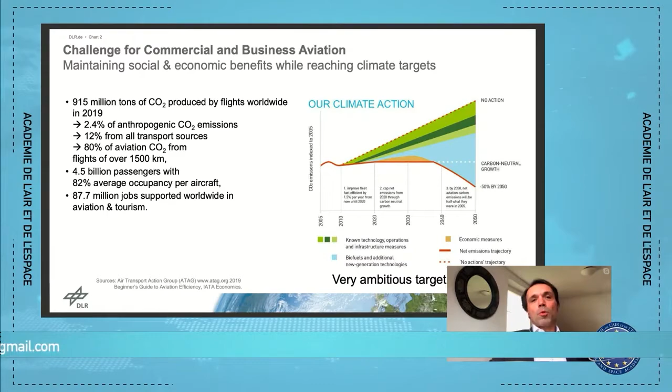Now, the air industry is a huge industry. We're looking at 4.5 billion passengers going from one country to another, one region to another. The movement of people is what creates jobs. We have almost 90 million jobs created by aviation alone. So we can't put an end to that, but it makes sense to organize a transition towards a decarbonized aviation industry.

On the right-hand side, you have a well-known chart. There are many others, but this has been around 10 years, since 2010, 2011. What was being highlighted here is that with technological improvement, we can bring down fuel consumption and therefore CO2 emissions by 1.5 to 1.8% annually. Accumulated, you are looking at spectacular numbers. Nonetheless, that is not enough to reverse the trend or to reach the objectives stated by society or indeed the air industry.

I was fortunate enough to work for a research institute. We take this as a starting point. What we find is that these goals are very ambitious indeed. So how do we propose to go anywhere near these objectives? And one item made clear this morning is the cumulative effect.

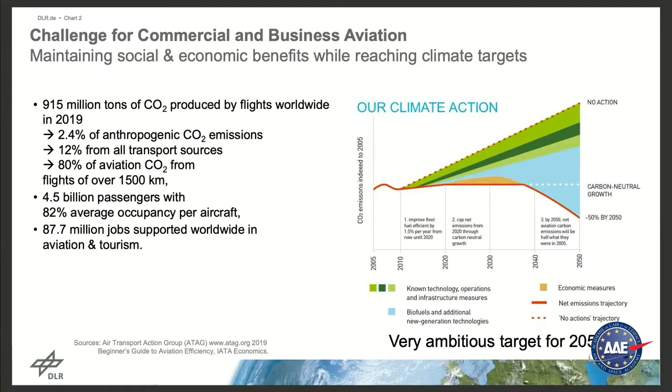Global warming related to the concentration of CO2 in the atmosphere is a cumulative factor with very, very long time scales. So even though, and we saw it today, in 2020, we find that there's a significant decrease in air transportation and indeed transportation in general. Nonetheless, that is not going to bring about a reduction in CO2 concentrations in the air over the same period of time. It will take a much longer period for this to come down.

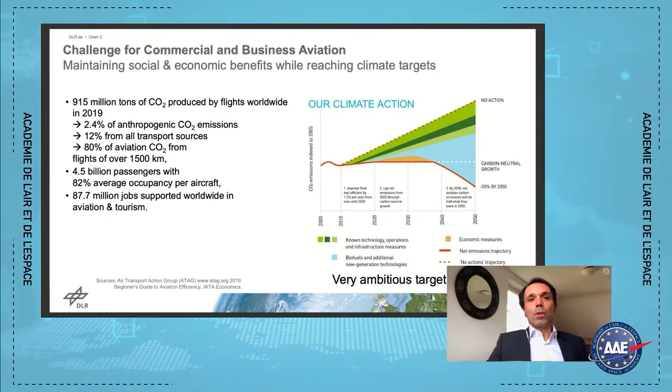So to reach the objectives by 2030 or 2050, we have to start working today. Indeed, we should have started yesterday. We can't expect to start working in 2030 and hope to have results in a few years' time.

Now, on the next slide, this reiterates to some extent what was clearly summarized in this morning's presentation, and of course Xavier went into details of this, but I would like to revisit this chart because you have the emissions from an aircraft, and we can see what changes this causes in the atmosphere, either by chemical reactions, a change of phase, or indeed the presence of aerosols. And then you can see the effects on climate.

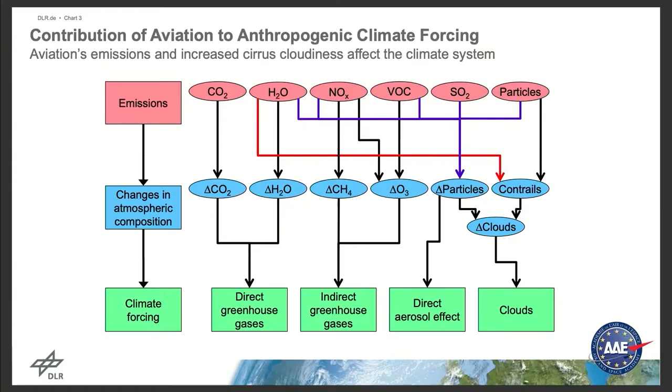So you have CO2, you have water vapor. So whether you burn hydrogen or hydrocarbons, you will find that water emissions will remain up in the air, and then of course you have nitrogen oxides, NOx, that you will find when high temperatures are involved. The volatile organic compounds that are not burnt, then you have SO2 and soot particles. So you have some recombinations. You can make methane or ozone that has an impact on the climate as well.

But let's zoom in on these particles because we find that they are very much related to the contrails that were noted, and which, of course, do also have some effect on the climate. It's difficult to quantify that, but regardless of the actual numbers, it has to be brought down, and the specificity of aviation is you're not just looking at CO2 effects over the life cycle. You have non-CO2 effects, as indeed presented on this slide.

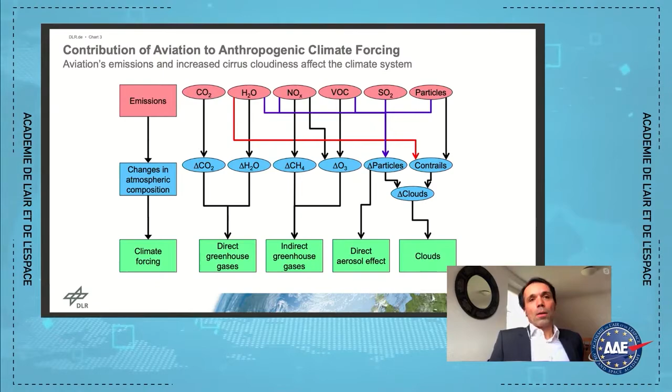So you have a direct effect that causes warming, or indirect effects where the radiative balance sheet is disrupted by reflecting radiation or preventing sun rays from going back into space. So that's the gamut of effects that can happen. It is for the air industry to see just what can be done to contain these factors that have an effect on temperature, both CO2 and non-CO2 effects, which then will bring to bear on the climate.

Now, this slide is a bit more quantitative. You have actual figures, for some of the components at least, on climate forcing, with of course an error margin, but research now tries to reduce uncertainty and have a better confidence interval. Now, we can see that the non-CO2 effects are much greater than CO2 effects. And if you take everything on board, you'd find that civil aviation has a 3.5% impact compared to other industries. So 3.5% is due to the air industry in terms of the radiative effect.

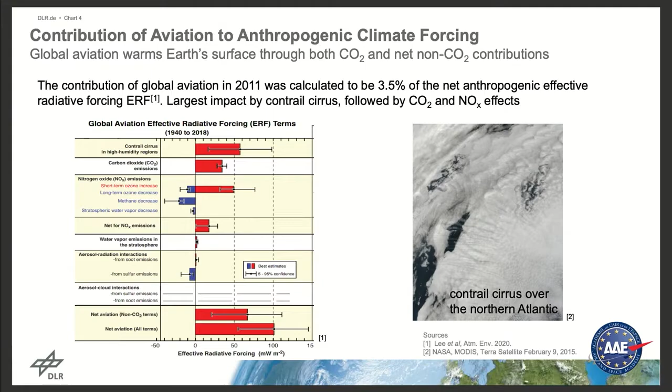Now, on the right-hand side, you have a picture that illustrates these factors combined. This is over the northern Atlantic. You have clouds formed up in the air by contrails, condensation trails, which can stay there for variable periods of time. How are they formed? Well, it's the steam coming from engines. And then you have soot particles that come from the aircraft itself, or they may already be in the air, and you have a large number of micrometric particles up to these altitudes, and that is where this water vapor can condense, and so these visible contrails will be formed and be areas where humidity is condensed.

So when you are way up there in the air, such contrails create artificial cirrus clouds that are created because of the presence of aircraft, and these can spread and cover wide areas and therefore disrupt the radiative balance to such an extent that you have a positive effect, in as much as temperature, basically the bottom line, will increase.

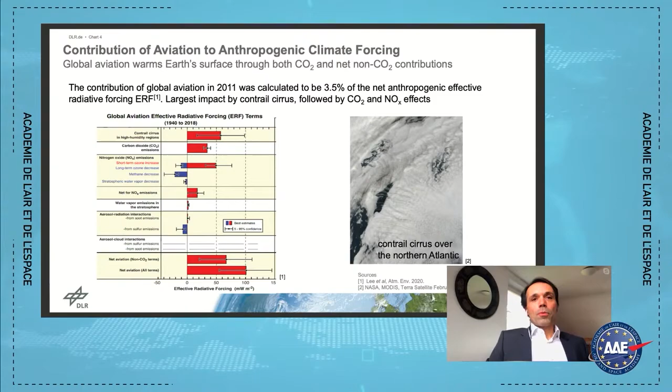And if you move on to the next slide, we arrive at, well, that's the whole chapter on hydrogen. We started off with the German approach to energy transition and see how this translates. So energy transition consists in you have machines using energy instead of using fossil fuel for energy. You have a sustainable and renewable source of energy.

So there are various ways of doing this. You can use wind power, you can use solar power, hydropower. Hydropower has been around for quite some time. It works quite well, and you have more recent technologies, tidal energy and other, well, more controversial forms of energy. But anyway, the energy transition is a well understood concept that has been there for quite some time.

And at least in Germany, efforts are being made now to continue activity, but using cleaner forms of energy, and especially sources of energy that can be sustainable. Now, European countries and developed countries in general will not only be using power as generated by these renewable sources, but also other energy vectors that could be liquid or gaseous.

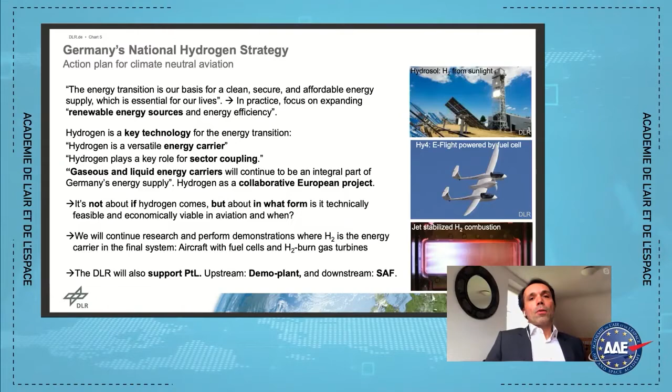So the question isn't so much about whether hydrogen is going to be part of the picture. It clearly will be part of the picture in terms of the range of energies that we have. The question is rather in what form. And you have three illustrations on the right, which are taken from the context of my research institute.

We know already, and this is, in the first case, a European project, how to produce so-called hydrosol, whereby the hydrogen is produced through thermochemical reactions in a concentrated solar park, or CSP, which focuses solar energy onto a reactor and has a catalytic effect, turning water into hydrogen. You can separate out the elements to produce hydrogen. Others mentioned electrolysis earlier. This is yet another way of doing this through photovoltaic cells. So that's something that many research centers, including the DLR, are looking at.

And as to how you can use hydrogen in aviation, one possible way is to have fuel cells, which can turn this energy into electrical power and thus into propulsion through an electric engine. Some flights with two-seater and even four-seater planes have been made to demonstrate feasibility. The future will tell us whether there are limitations to the scale that can be achieved because of the weight of these fuel cells.

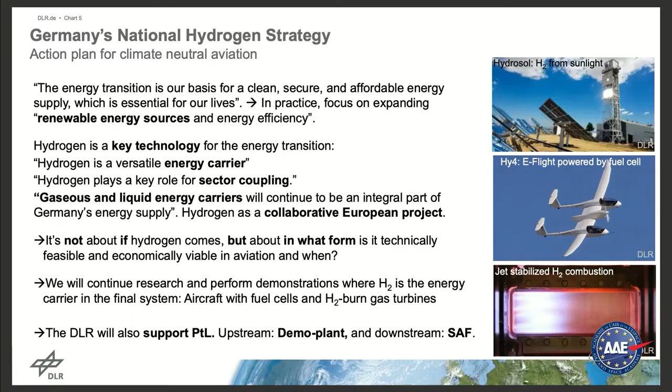Upstream, we're going to be looking into how to produce hydrogen-based hydrocarbons, so renewable electrical power, and from there on hydrogen, also taking CO2 from the air. It's part of the PTL, or power to liquid process, and then at the downstream level using the so-called SAFs, the Sustainable Aviation Fuels. So these are the two key ideas the rest of my presentation will be focusing on.

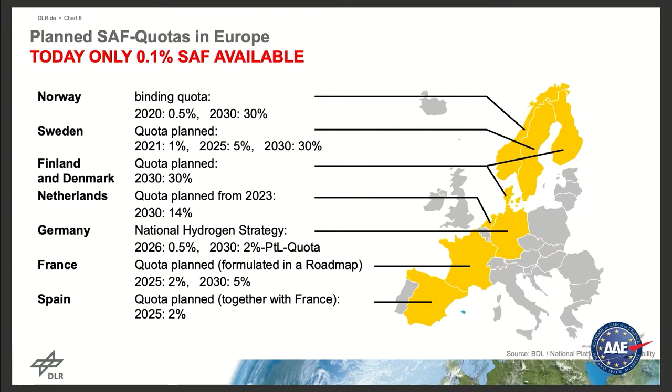So just for context, a few words about the Sustainable Aviation Fuels, or SAFs. I was showing you that earlier plot from some 10 years ago. There has been an increased awareness achieved, and almost 10 years ago, people were sounding the alarm, saying we really have to start working now to produce these kinds of fuels that will enable us to achieve the decarbonation of aviation, and we're at 0.1%, as you can see today, of available SAFs, which is very, very little.

There are binding quotas in Norway of 0.5%, very recently in 2020, 30% by 2030, and then in some other countries, rather, there are quotas planned. I mean, these are things that the policymakers are trending towards. So you can see some countries are being much more decisive or aggressive in the short term. Others, perhaps like France and Germany, less so.

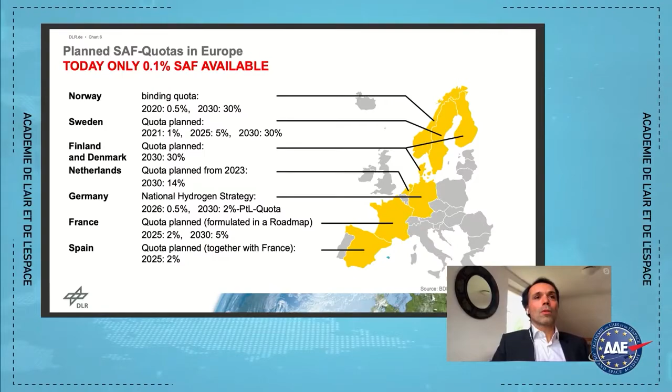The more proactive, aggressive policies will no doubt contribute to changing the shape of the curve. But certainly the others, certainly as far as aviation is concerned, will not enable us to meet the expected trends. And one way or another, we're going to have to do something about this figure of 0.1%, as you can see.

What we are trying to do is to use technologies that have shown their worth and that can still fly. The lifespan of an aircraft is quite long, and you can't just renew the whole fleet overnight just to achieve those goals. So we need to develop alternative fuels which initially at least are drop-in, in the sense that they're fully compatible with current airports and aircraft.

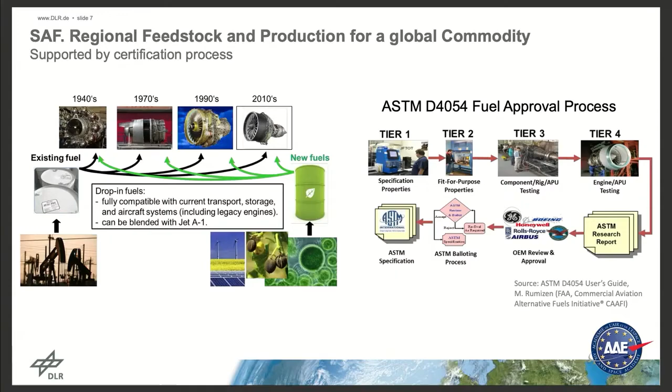And this is done through a whole lot of testing, which is costly in terms of time and funding. But the first and foremost rule in aeronautics is flight safety. And so this is essential if we are to make sure that these fuels that are on the market do not pose any technical problems for being loaded into aircraft for propulsion purposes.

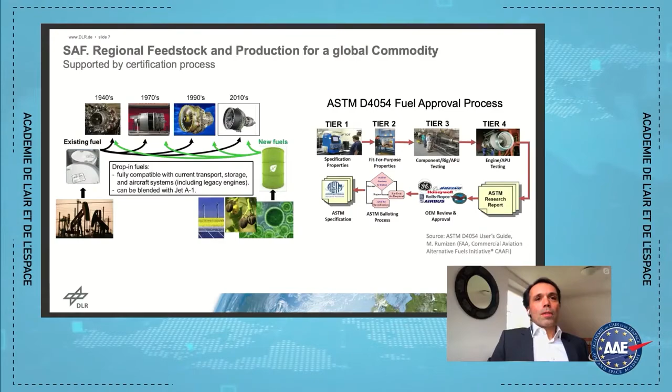So Jet A1, the kerosene that we're familiar with, is not simply a hydrocarbon which is burned to turn chemical into mechanical energy. It is also a heat exchanger. Almost 80% of aircraft will be using that very high performance fuel. And you can't just replace it with ethanol, although it might work well for terrestrial vehicles.

So having established that we have some 8 different kinds of alternative fuels that can be used, and there are others in the pipeline which are going to be studied, considered, possibly approved, we need to look into their properties and see why these specific fuels could be dropped in in lieu of existing fuels, and possibly in a relatively close future try to optimize these fuels and maximize the advantages these synthetic fuels can deliver. Because now we're no longer talking about a fossil fuel that nature provides, but rather a synthetic fuel that we synthesize ourselves, and that thus could possibly leave us more leeway for optimization and reduction of emissions.

So gathered together in one plate here in a very condensed summary form, you can see what we are doing in the lab where I work. We look at the composition of the fuel. We look at the properties of the fuels. In this case, the example is Jet A1, but there might be plant oil or recovered oil-based fuels. As Philippe was saying, there are other fuels that may come from sugars or lignocellulose, the residues of the forestry industry. And all of these fuels will each have their own specificities, with a specific range of composition profiles and properties which can either be very similar or very different.

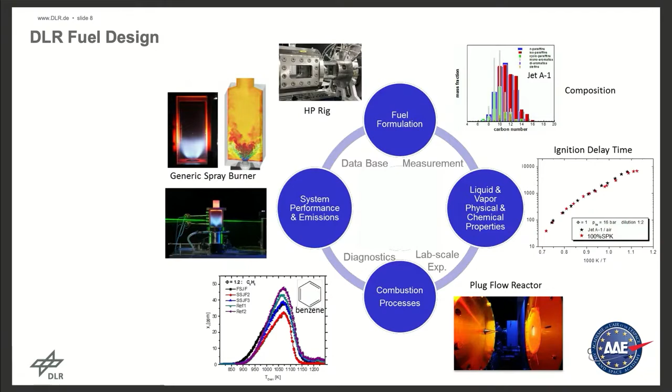Some of these are precursors for the soot that I was talking about earlier, which are not a desirable thing to have in the environment close to airports, but nor do you want them present at high altitudes because of their ability to provide for the condensation of water. So we want to cut down on the amount of soot, and depending on the type of fuel, we can cut down on some of these precursors of soot, such as benzene, but there are many other kinds as well, and work on the makeup of the fuel to try to achieve this.

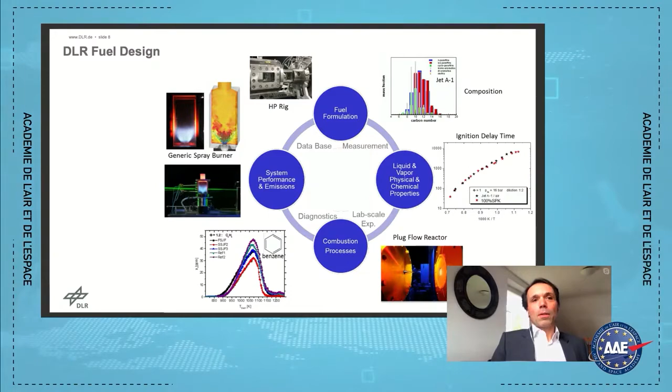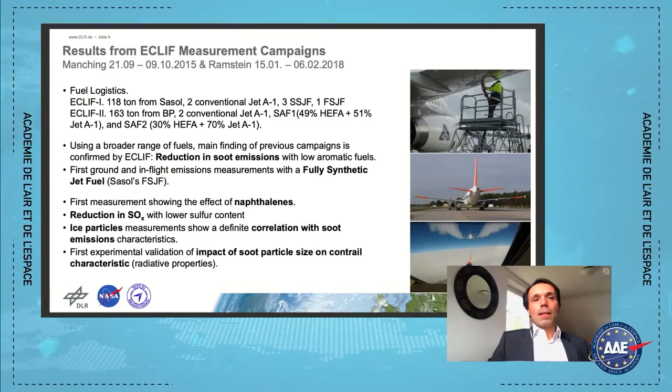And we can then observe this in the reactor or in generic flames, but also under pressure on test benches and directly in real conditions at high altitude. And this is a measurement campaign I was fortunate enough to take part in. There were, in fact, 2 campaigns as part of the project, one in 2015, one in 2018. And during both campaigns, we burned different kinds of fuels, comparing them with Jet A1 as a reference fuel. Some of these were fossil fuels, but synthetically made, looking at different possible variations in composition.

Of course, we were doing this in an experimental way to see how different compositions of fuel might behave, and to check whether what we saw in the lab would be verified in the air, looking also at the difference between engines on the ground and engines in flight, the exhaust gases that are released when you are at altitude, as you can see in the bottom right picture, and when the crystallization of ice particles occurs.

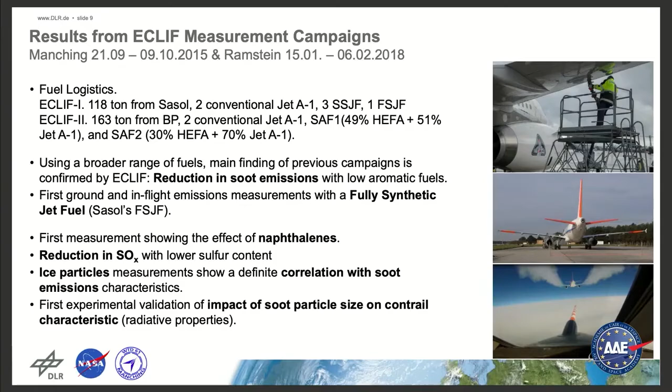And we also saw the connection between soot emissions and the concentrations of ice particles in the contrails. So we can reduce the effect on the radiative balance, which is exactly what we want to do. Now, looking more closely at the second campaign of 2018, we were comparing two, let's say, sustainable fuels based on the HEFA, or the hydroprocessed esters and fatty acids.

And we had different proportions. In the first case, 50%, the second 30% of the Jet A1. In the second case, there was 30% alternative or SAF fuel, but it still enabled, or rather, excuse me, it enabled a marked reduction in the amount of soot.

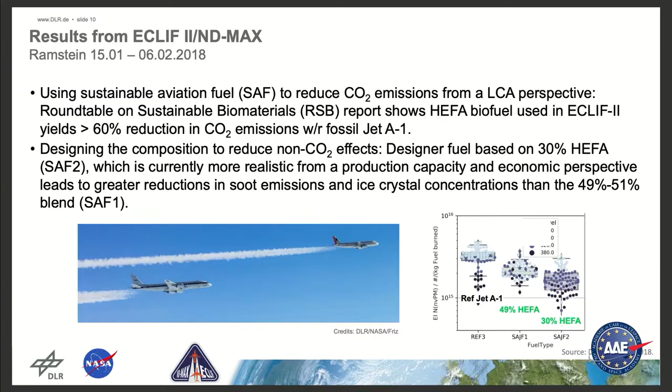So what we can conclude from this is that by looking at the composition of the elements of these fuels, we were able to achieve encouraging results while remaining at economically viable levels, even though these fuels are very much more expensive than traditional kerosene. 50% of new designer fuel would not be achievable for that reason, but 30% is more achievable, and that is why in some cases there have been trials.

So I have shown the connection between the fuels and production of soot at high level and contrails, how we can try to reduce these to have less of an impact from aviation on the climate. And if indeed we can reduce the production of soot to the tune of 80 to 90%, which is achievable, correspondingly, we will be reducing the radiative balance.

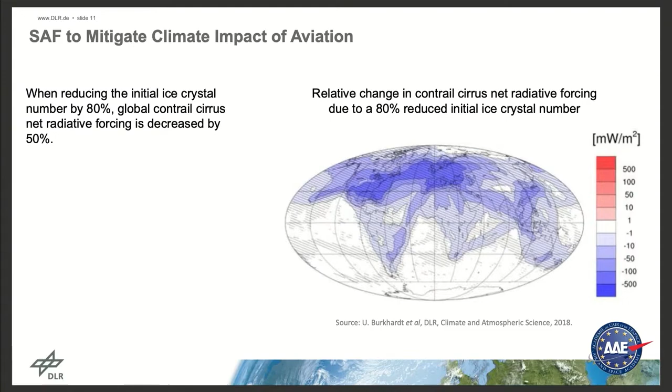Clearly, for all of us, air transport and tourist travel in the future will no doubt be somewhat more expensive, but this will be with the aim of trying to reduce their impact on the climate. Now I'm going to talk about hydrogen. We've seen traditional fuels that can be blended up to 50%, and that's already allowed, and you can substantially reduce the climate impacts of aviation.

In the very short term, I think that it would also be doable to use these synthetic fuels for 100%, with all the associated benefits, the CO2 reduction over the life cycle, but also all the emissions I've just talked about. And in the more or less distant future, the use of hydrogen. Here, these are the two options. Either you burn the hydrogen directly, which is similar to what was shown earlier, that will lead to differences in the engines and also the shape or the length of the aircraft.

It depends how you consider it, but in order to be able to transport this fuel, since its energy density is very different, if you liquefy it, you'll need 4 times the size of current tanks. So that's probably going to change all this. And there are also lots of questions that are still open. So there are a lot of questions at the DLR in this direction to try and solve these technological questions.

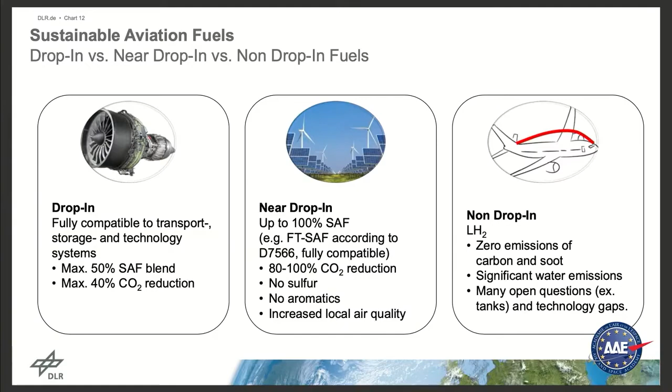One example that I could show you, I'm in a combustion institute, so I'll show you a few combustion examples on this next slide. Here it's if you're considering burning the hydrogen directly, what is that going to lead to?

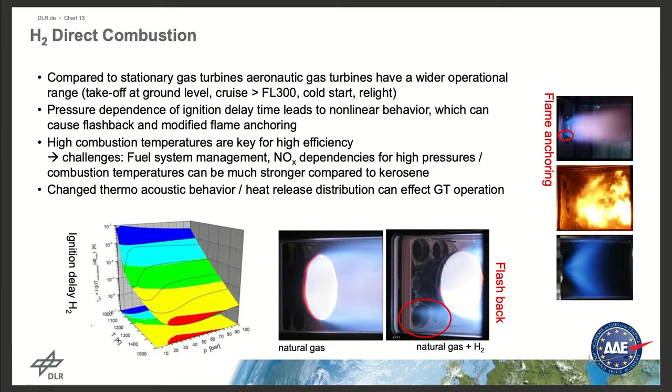This is something that you could consider doing right now. So you could produce electricity via stationary gas turbines, where you could use almost 100% hydrogen. In aeronautics, though, the range of thrust and power that's required and the range of performance for gas turbines is much wider. So that requires a huge effort in terms of research and development in order to be able to create these engines that would burn hydrogen directly.

We think that it's feasible, but you need to be careful about a few things. At the left, you've got a graph showing the ignition delay times for hydrogen when it's mixed with air, and you can see that there's a non-linear behavior similar to other fuels. If you increase the temperature, you reduce the ignition delay, and if you increase pressure at first up to 10 or 15 bars, you'll slightly lengthen the ignition delay, but it will suddenly drop. So in order to be able to produce and design an engine technology that can cope with the specific properties of hydrogen, it's relatively complicated.

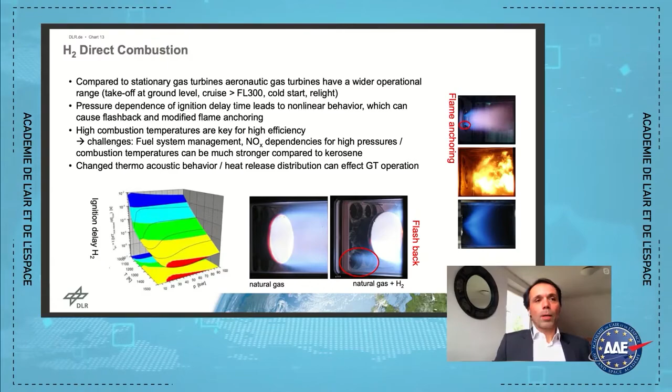And that's only the example of combustion; there are many other areas like storage. That's a fuel that burns very well and very quickly, so you need to be careful about safety aspects. So first you need to fix all that before you can fly with this fuel. That's why on the next slide we would like first to work with the use of hydrogen, but in order to produce a liquid hydrocarbon that will help us use current infrastructure, both in terms of transport, but also storage and fuel use.

Earlier, I showed you the German policy regarding hydrogen. There's a whole strategy that's going to unfold around hydrogen, in particular for some modes of transport like aviation that really doesn't have an alternative for long-haul flights. There's no alternative, at least until 2070, and probably also for road transport, such as lorries. There are very few alternatives, so these fuels are going to be useful. So in this German hydrogen strategy, there's a form of mandate, which is to expect up to 2% of PTL-based kerosene for aviation.

What is already available? The various components required for the production of PTLs, power-to-liquid fuels, already exist at different levels of maturity and at different scales. There are some pilot plants in existence to produce up to a few kilograms per day, some of them in Germany. I saw them, they work, but now we'll need to bring this technology to a demonstrator scale so that we can then reach marketing scale and also address the various technological questions and challenges along the way.

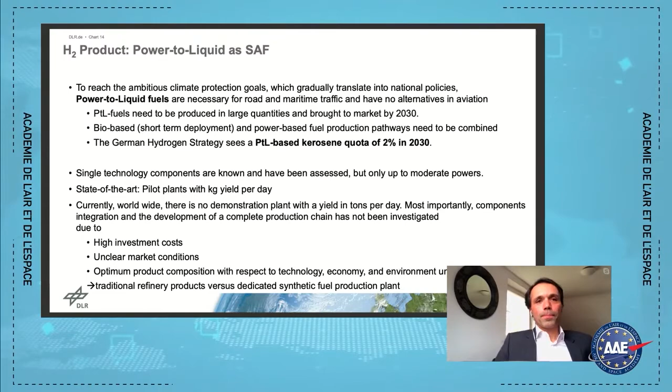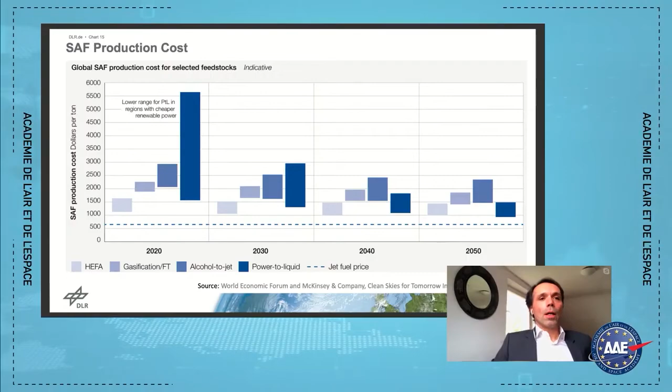Next slide, please. There was a lot of text, so I'm coming back to a picture-heavy slide, a comparison of prices, comparing different technologies based on biomass that can be planted and grown, or rather bioorganic waste-based biomass. This is HEFA, hydro-treated esters and fatty acids, also gasification FT. So gasification, that's municipal and organic waste that's going to be gasified. And so the synthetic gas coming from gasification can then be reused in the Fischer-Tropsch process in order to produce hydrocarbons.

And so alcohol to jet: biomass such as sugars, starches can be turned into various alcohols, ethanol or butanol or isobutanol. And with this, with various processes, they can be turned into jet fuel, and there's also power to liquid. So first of all, the quantities are not there, and prices are exorbitant for power to liquid. But what I'm highlighting here in the 2020 column is that we need to have these pilots, units and demonstrators so that we can scale up very quickly.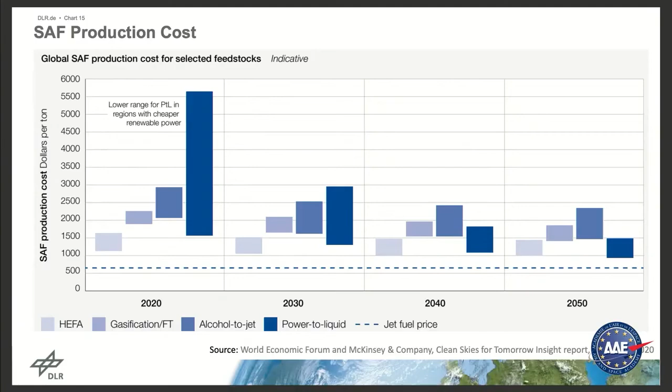And then you can see that with this scenario produced by McKinsey on request from the World Economic Forum, the scenario predicts a price reduction, and based on the benchmark price of jet fuel, you can see that there might be a market.

On the next slide now, I've shown you how we are conducting research on the various SAFs, these alternative fuels, and this is what we are considering as demonstrators for PTLs. This is a pre-study that we're involved in with another two partners, an engineering firm called John Brown Voest and the Technical University of Hamburg, in partnership with support from the Ministry for Transport and Digitalization. So we are conducting this pre-study to look at the components to be selected in order to build a demonstrator that would help us produce up to 10,000 tons per year.

And once this demonstrator is there, then we can study the integration of these various components. This is what really matters. Electrolyzers exist, reactors used to package the various products exist, reactors for Fischer-Tropsch already exist, and then the whole downstream traditional refineries already exist, but integrating all that together, and most importantly, connecting that to an intermittent renewable energy source like wind or photovoltaic, such integration is probably going to be the crux in this demonstrator.

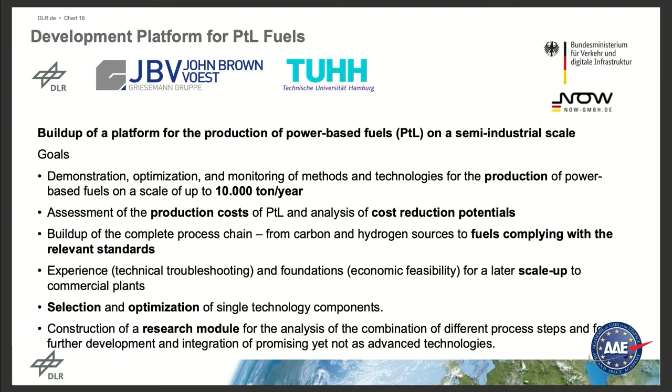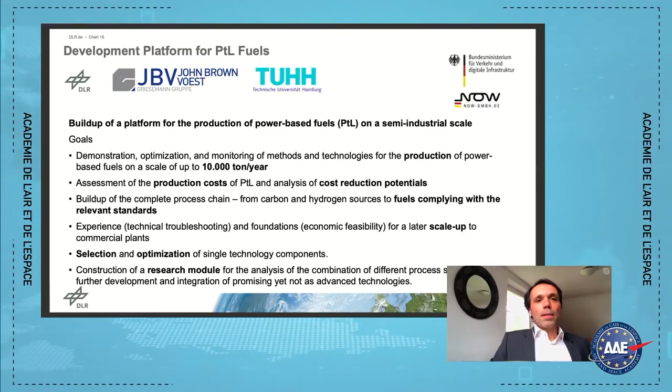And then there are going to be technical, economic studies, and then product optimization. The first product is going to be kerosene, but there will also be byproducts, and we'll need to see how we can use them. Alongside this demonstrator, there's going to be a research module where we can look at potentially less technologically mature components, but with a lot of potential in terms of performance and, above all, better efficiency. Last slide, please.

So here you've got what it may look like. This is what we call our demonstrator. What is important, and that's why you can see that as jigsaw pieces: these various modules are interchangeable. So there's not just one operator and research institute. Several can come and test out their various components.

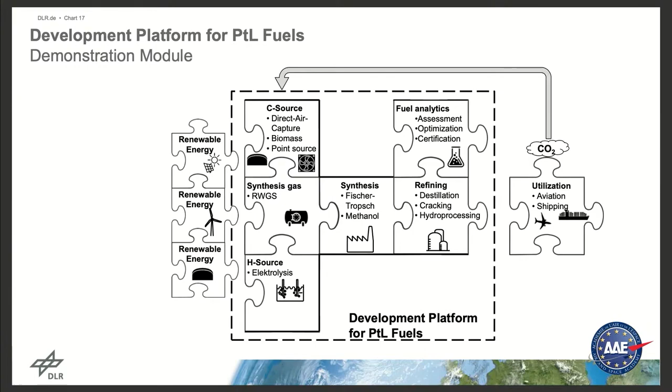So you've got the renewable energy sources on the left, various kinds, and then the first transformation step in order to produce a source of carbon monoxide if you're using Fischer-Tropsch from CO2, and CO2 for the demonstrator may not be directly captured from the air, but rather maybe biogas. Biogas can be used elsewhere, but biogas production generates CO2, which is renewable. So that would be a first source. Then an RWGS, reverse water gas shift reactor, to turn CO2 into carbon monoxide by using a part of hydrogen, and the hydrogen was produced by the electrolyzer.

So first, a simple electrolyzer using water to produce hydrogen, and at a later stage you could have co-electrolysis, so CO2 and water directly producing synthetic gas, so CO and hydrogen. And then either a Fischer-Tropsch route, as I mentioned, or you can go through methanol, which is interesting because you don't need carbon monoxide. You can directly use CO2 and hydrogen. And then the downstream part, which to me is fairly traditional. There are a lot of questions about certification when it comes to refining and use. But